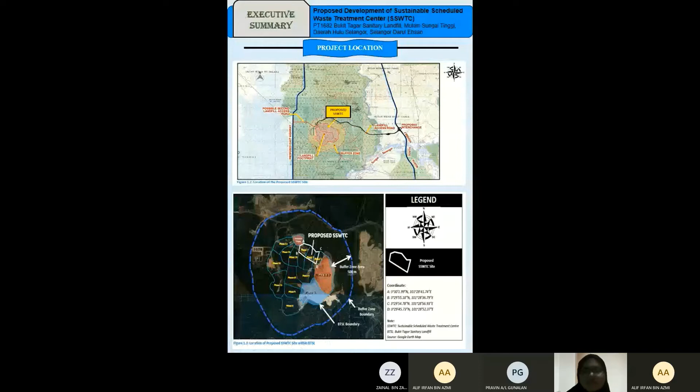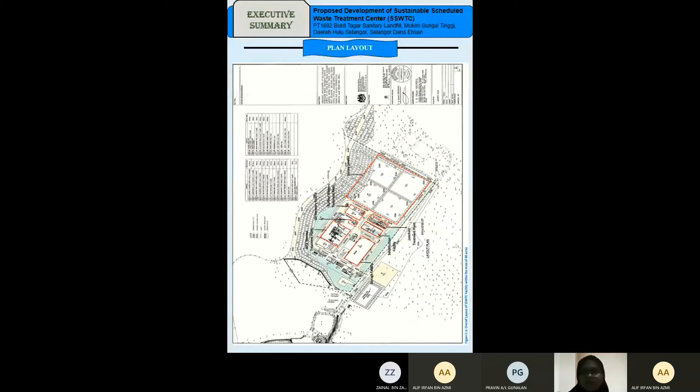For the plan layout, it shows the overall plan layout for the treatment plant at the specific area within the 40 acres of land.

Next, the project concept. First, the WTE thermal treatment plant, with capacity of 20,000 tonnes annually or 70 metric tonnes per day. The type to be used is rotary kiln stoker.

For the storage facility, the capacity is 10,000 tonnes with a maximum storage duration of 6 months, and the waste will be stored based on its characteristics and compatibility.

For the secure landfill, the capacity will be 350,000 cubic meters of airspace, with a base liner using a double-line landfill system and a single collection pipe.

For the solidification facility, the capacity is 8,000 tonnes annually, with operation time of 8 hours every day. The reagents used are waste 100%, sand 100%, cement about 20 to 30%, lime 10%, and water more than 50%.

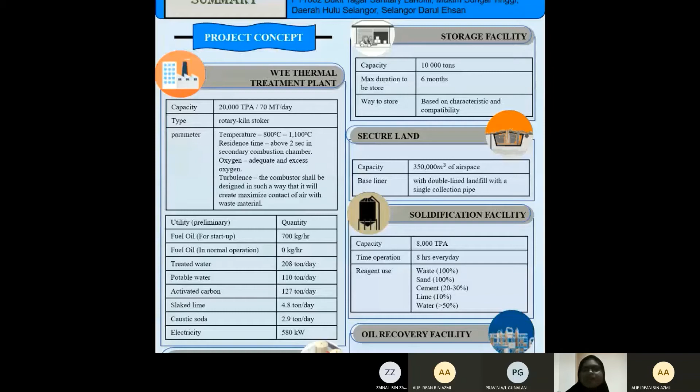For the process flow chart, waste will be obtained from healthcare facilities and industry to the SSWTC and sent to the storage area for WAC testing, while clinical waste will go directly to the WTE thermal treatment plant.

After WAC testing, the waste will be divided into three categories. First, organic solid and liquid scheduled waste will go to the WTE thermal treatment. Second, inorganic solid and liquid scheduled waste will go to the solidification facility.

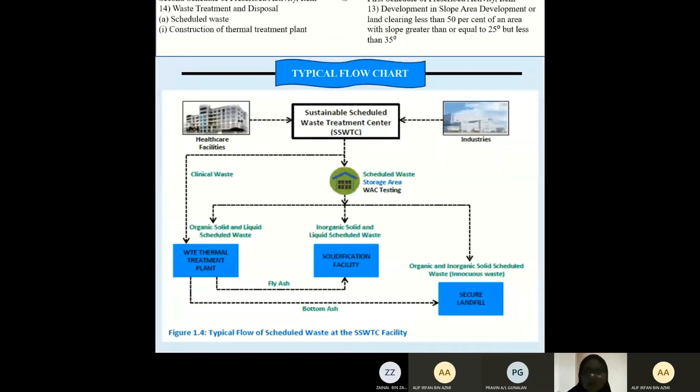Last, organic and inorganic solid scheduled waste will go to the secure landfill, while the output from the WTE thermal treatment plant—fly ash—will go to the solidification facility, and the bottom ash will go to the secure landfill. So, I will explain about the current environment condition.

This part outlines the existing environment concerning the physical environment, land pattern, socio-economic characteristics, and human condition in the vicinity of the existing proposed project site. The information serves as background baseline data on various aspects of the subject matter in connection with the proposed scheduled waste management facility. The existing environment baseline is obtained from primary and secondary sources.

Field investigations were carried out to supplement any insufficient information for the study area. The condition of the existing environment of the project site

is described within a 5 km radius of the surrounding area. The compiled data on the existing environment is regarded as the baseline environmental condition, to assess potential environmental change that may arise during the implementation of the project.

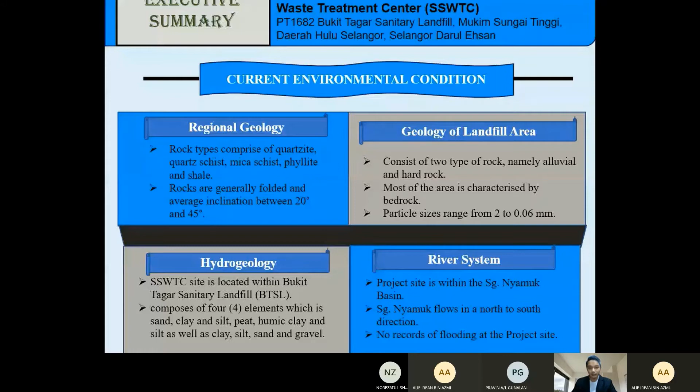So first, we must collect data on environmental conditions such as the physical environment. The physical environment includes regional geology, geology of the landfill area, hydrogeology, river system, climate, existing meteorological data, annual and monthly rainfall, temperature, relative humidity, surface wind, cloud cover, residents, and population.

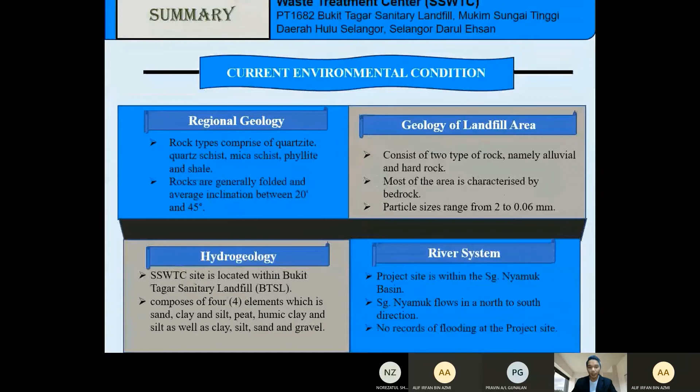For the surface winds, the wind is mostly from the northwest, at 18.5%, followed by the west at 12.1%, and north and southeast at 10.2% respectively. The strongest wind directions are mainly from the southeast, southwest, and northwest, ranging from 5.5 to 7.9

meters per second, though this rarely occurs, at 0.8%. The most frequent occurrence of wind speed is at 0.3 to 1.5 meters per second, while the second most frequent is at 1.6 to 3.3 meters per second.

Cloud cover: based on the table, the mean annual cloud cover was fairly constant at 6.9 to 7.1 oktas. The project site can be expected to experience similar cloud cover.

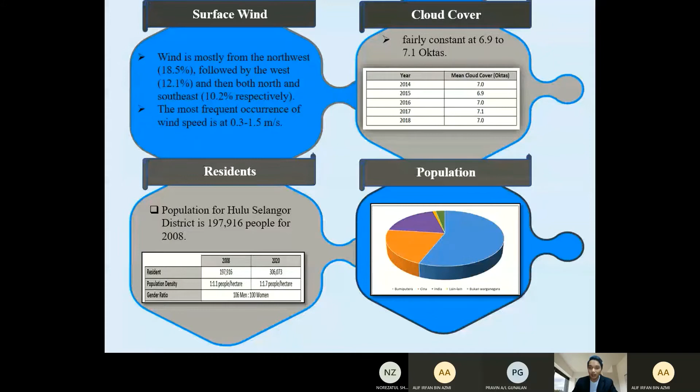The population for Hulu Selangor district is 197,916 people for 2008, and is expected to increase by 3.7%. The development and filling of existing vacant industrial areas is expected to prevent migration out of the Hulu Selangor district.

The identification process is through site visits to the ZOI, reviewing the Hulu Selangor Local Plan 2020, information gathered from engagement with authorities, satellite imagery by remote sensing, and also drone surveys.

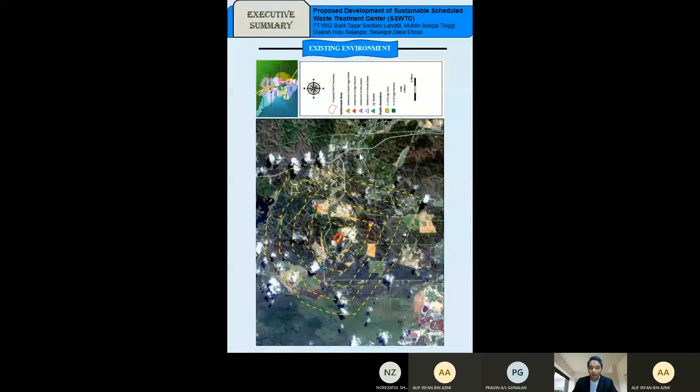If you can see the next maps, this is the map for water intake points. The main purpose of an intake is to ensure a constant water supply that can be adjusted to suit local conditions. Good evening, so now I will be explaining the impact assessment.

There are 11 aspects of impact assessment. First is air quality. The method of assessment is air dispersion modeling, and the criteria is based on ambient air quality standards. The outcome has two parts: construction and operation. In construction, a minor impact is predicted, and for operation, degradation of air quality is expected due to various types of emissions.

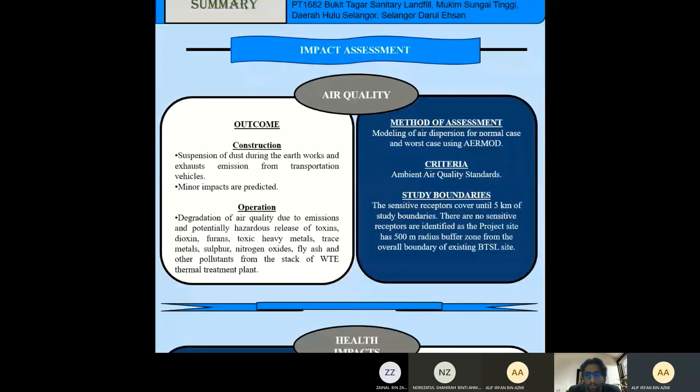For health impacts, the method of assessment and criteria are based on health assessment and acceptable lifetime carcinogenic risk range respectively. For the outcome, minor impacts are predicted during construction. For operation, there is health risk to local residents due to prolonged exposure to toxic and hazardous materials.

Next, land disturbance: the method of assessment is the modified universal soil loss equation, and the criteria is based on guidance documents for addressing soil erosion and sediment control aspects. For the outcome, during construction there is earthwork and site clearing with removal of vegetation, while minor impacts are predicted during operation.

Fourth, we focus on waste management, which will have significant impact. The method of assessment is to identify the waste generated and the type of waste. The criteria is based on waste procedures as per regulations. The outcome for construction is solid waste generated during construction activities, and for operation it is the residue, fly ash, and bottom ash generated from operation of the thermal treatment plant.

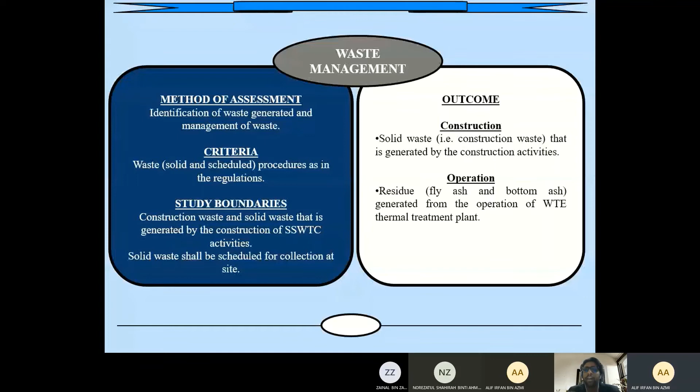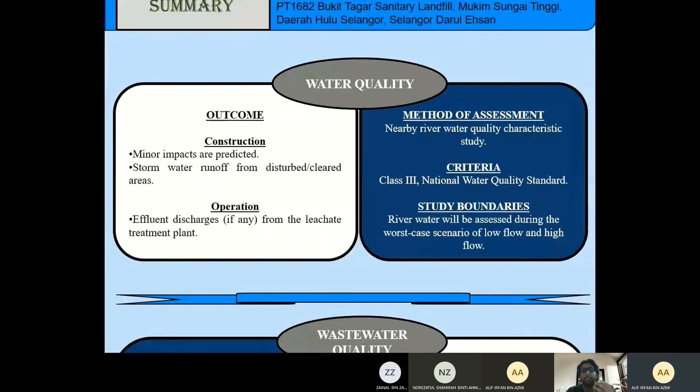For water quality, the method of assessment is a nearby river water quality characteristic study, and the criteria follows the Class 3 national water quality standard. For the outcome, construction has a minor impact from stormwater runoff from disturbed and cleared areas. For operation, there is effluent discharge from the leachate treatment plant, which is a significant impact for water quality.

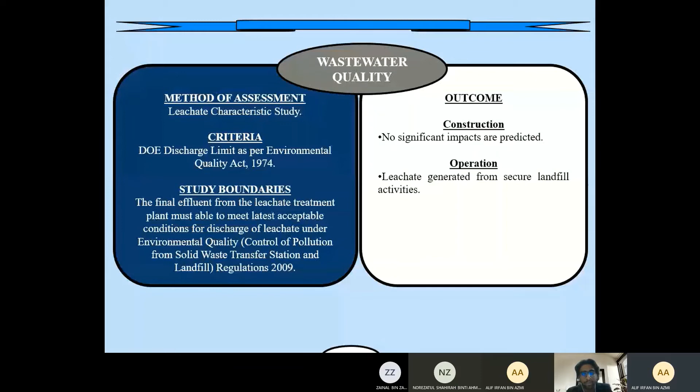Next, wastewater quality: the method of assessment is based on leachate characteristic study, and the criteria is based on the DOE discharge limit as per the Environmental Quality Act 1974. For the outcome, there is no significant impact during construction, but during operation there is leachate generated from the secure landfill activities. All right, next.

There will also be groundwater quality. Just now I explained the water quality, wastewater, now the groundwater quality. For the groundwater quality, the simulation of the groundwater flow and the groundwater quality impact will be the method of assessment. For the criteria, it will be limits stated in the Standard Kualiti Air Tanah Kebangsaan.

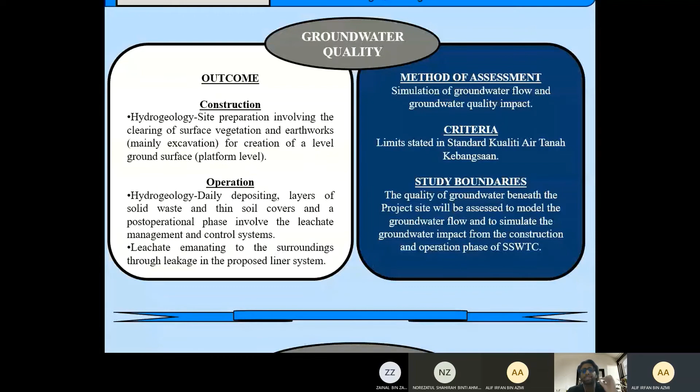For the impact, the significant impact for construction wise will be hydrogeology, the site preparation involving the clearing of surface vegetation. For operation, the hydrogeology involves daily depositing layers of solid waste and thin soil covers, and the post-operational phase involves the leachate management and control system. So this will be the impact. Next.

For the quantitative risk assessment, the method of assessment is the QRA individual risk modeling. We will use this model. For the criteria, we will follow two criteria: 1 times 10 to the negative 6 fatality per year, and also 1 times 10 to the negative 5 fatality per year.

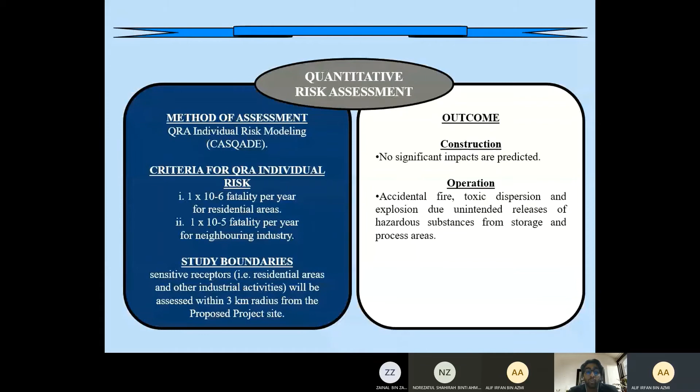For the outcome, for construction, there will be no significant impact. But for the operation, there will be an accidental fire, toxic dispersion, and also explosion due to the unintended release of hazardous substance. Alright, next.

We also need to focus on the social part. For this, the criteria will be locality of the survey site, physical components, and people perceived within 5 km radius. From the outcome, the significant impact will be the impact due to construction activity, and for operation, the change in the socio-economic environment caused by the daily operation of the landfill activities.

For the noise quality, the method of assessment will be based on the assessment of the permissible noise level, and the criteria will be maximum permissible sound level by the receiving land use for the planning and new development.

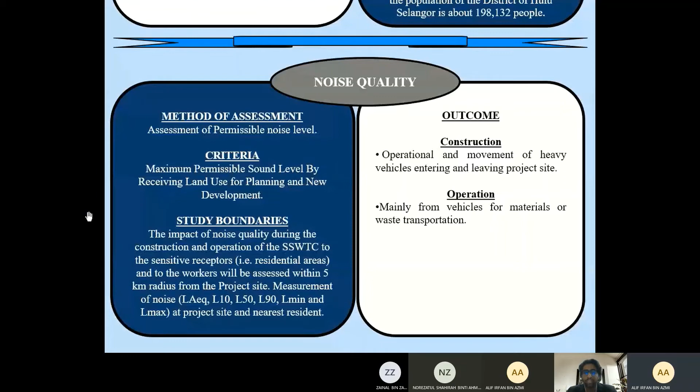For noise quality, the outcome will be based on the operational movement of heavy vehicles entering and leaving the project site for construction wise, and for operation wise, mainly from vehicles for materials or waste transportation. For the final part of the impact assessment will be the odor quality.

So this will be the 11 aspects of the impact assessment, and I explained the method of assessment, the criteria, and the significant impact in terms of operation and construction. Alright, thank you very much.

Okay, thank you, Pravin. So next is for mitigation. There are several mitigation measures for each of the impacts. So the first one is mitigation measures for air quality.

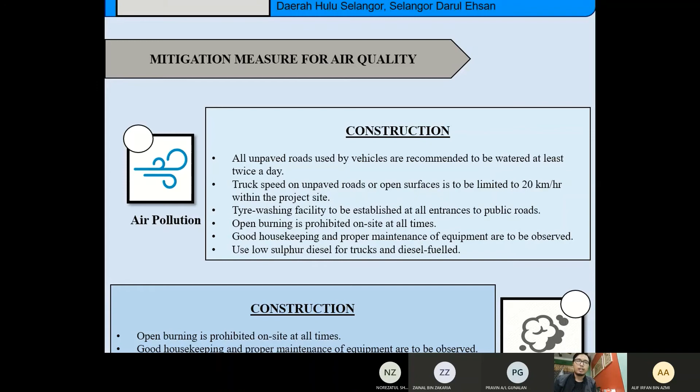For the construction, when construction happens, open burning is prohibited on site at all times, and good housekeeping and proper maintenance of equipment are to be observed. And use low sulfur diesel for trucks and diesel fuel.

Next is for the construction part, which includes the dust, which once again, open burning is prohibited on site at all times, and same as the air pollution, good housekeeping, use low sulfur diesel, and switch off engine when idling.

Next is for the operation, which involves the WTE thermal treatment plant. Air pollution control system for the flue gas treatment shall be in continuous operation, performance monitoring and thermal treatment process is essential, and scheduled preventive maintenance shall be implemented.

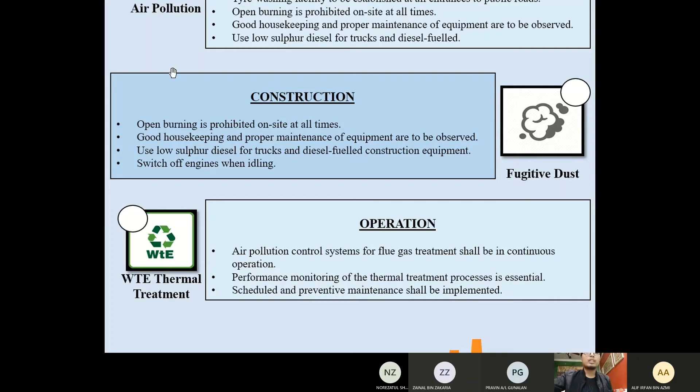Next is mitigation measures for health impact. The first one is for land preparation, which is for construction: proper traffic management, wet method to control dust, implementation of safe work practice, clean water supplies, and proper solid waste disposal.

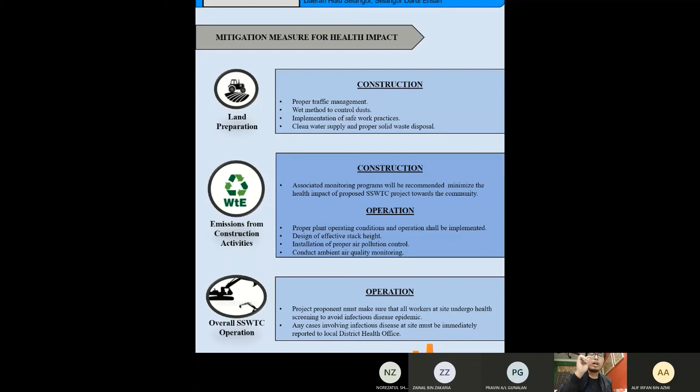So for the WTE, for health impact, proper operating conditions and operation shall be implemented, which includes design of effective stack height, installation of proper air pollution control, and conducting ambient air quality monitoring. For the overall SSWTC operation, the project proponent needs to make sure that all workers at site undergo health screening to avoid infectious disease epidemic.

Any case involving infectious disease at site must be immediately reported to the local district health office.

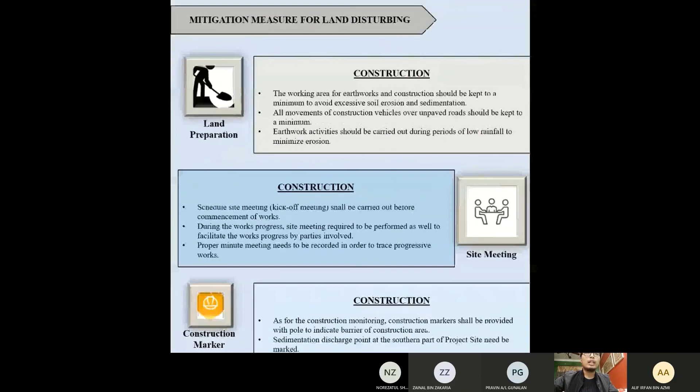Next are the mitigation measures for land disturbing. For land preparation during construction, the working area for earthwork and construction should be kept to a minimum to avoid excessive soil erosion and sedimentation, and all movement of construction vehicles over unpaved roads should be kept to a minimum. Earthwork activity should be carried out during periods of low rainfall to minimize erosion.

For construction, a scheduled site meeting should be carried out before commencement of work, and during work progress, site meetings are required to facilitate progress among parties involved. Proper minutes need to be recorded in order to trace progressive work.

The last one is construction markers. For construction monitoring, markers shall be provided with poles to indicate the barrier of the construction area, and the sedimentation discharge point at the southern part of the project site needs to be marked.